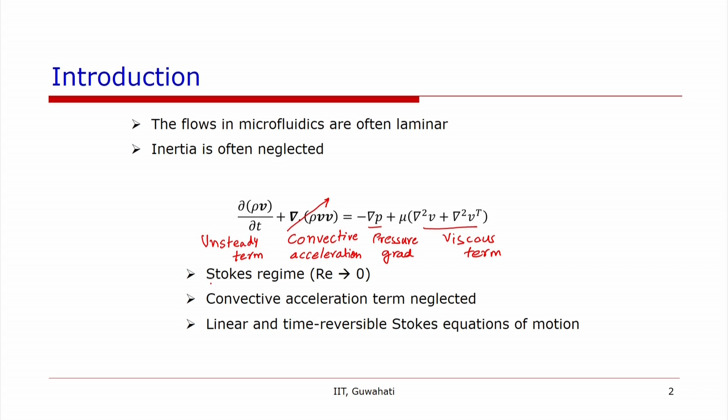When the Reynolds number is low, we often tend to neglect the convective acceleration term, and the unsteady term can be neglected if the flow is steady. This suggests the flow to be in the Stokes regime.

Why do we tend to do this? Because this gives us a linear differential equation which can be solved analytically.

Now, this may not always be the case, because we know that in a channel, flow is often laminar below Reynolds number 2300 or so. But for example, if we have a Reynolds number of 100, then the inertia is not negligible. We cannot neglect the inertial term, but the flow will still be laminar.

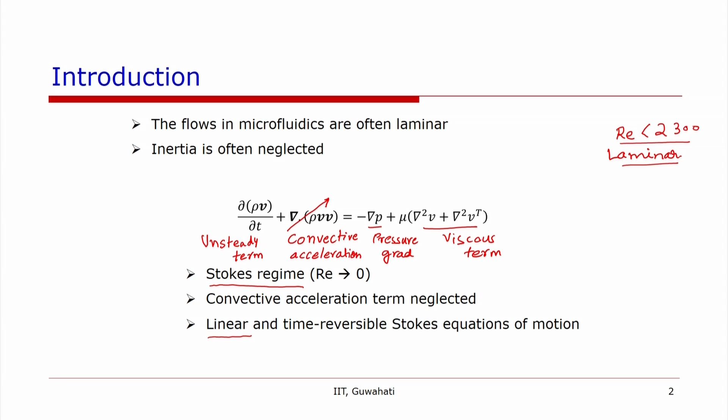So in the Stokes regime, there are some beautiful results that one can see. For example...

In the mirror symmetry time reversal theorem, Bretherton suggested that when moving in a steady unidirectional shear flow, which can be represented where we have a gradient in the velocity, at small Reynolds number under the action of viscous forces alone, inertial forces are neglected and the flow is Stokes flow.

To every orbit of a given finite rigid body, there corresponds one of the body of opposite mirror symmetry. The corresponding orbits are mirror images obtained by reflection in a plane perpendicular to the streamline but traversed in opposite sense. This suggests that if a rigid spherical particle, or a sufficiently symmetric particle which is symmetric about its rotational axis, no lift force will act on it for a simple channel flow.

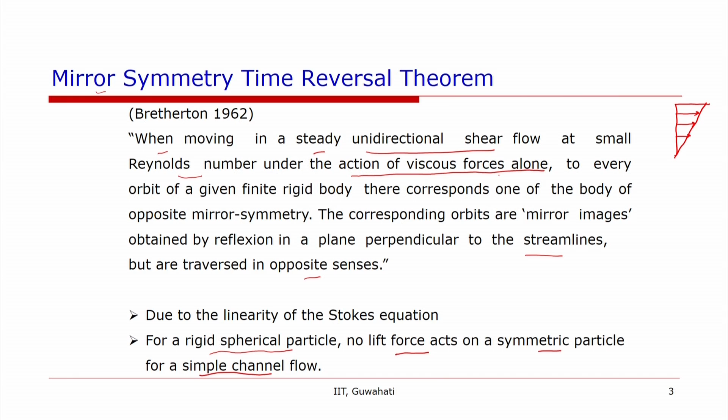So the particles will not experience any lift force, and by lift force here I mean the force on the particle in the transverse direction, the direction normal to the streamlines. So the flow is symmetric in Stokes flow. However...

In microchannels we can also experience non-linear effects due to a number of facts. For example, if the flow is non-Newtonian, it may follow a power law model, or it can be a viscoelastic fluid, and so on. So the non-linear effects can come into the picture when the fluid is...

Non-linear effects can come into the picture when the fluid is non-Newtonian, or when the structure of the channel in which the flow is happening is asymmetric. That can also give rise to non-linear effects in the flow.

And if the shape of the particle, as we have just seen, is symmetric about its rotational axis, then it does not experience any transverse lift. But if the shape of the particle is asymmetric, then we can see non-linear effects. If the particles are deformable, then deformability of the particle may also induce a non-linear effect, such as a lift on the particles.

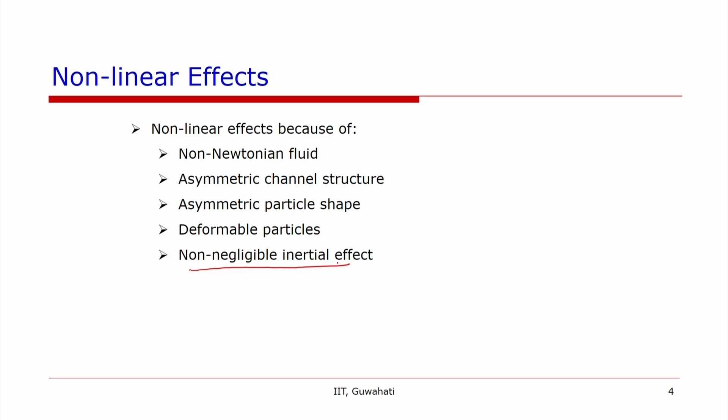And finally, what we are concerned with in this lecture is when the inertial effects are non-negligible. So, inertial effects can be important in microfluidics.

As we said just a few slides back, the flow in the microchannels is still laminar but non-negligible, say at about Reynolds number 100, and this has the properties of laminar flow in the sense that the flow is deterministic in nature. You can still solve the equations without needing heuristic models. You may not always solve them analytically, but you can get a numerical solution without the need for empirical or heuristic models for turbulent flow.

And the fluids and particles can still be controlled and manipulated like we can do in the Stokes regime, plus the additional effects that come into picture, that the flow becomes non-linear and the motion of the fluid is irreversible, unlike in Stokes flow. And these effects can be quite important.

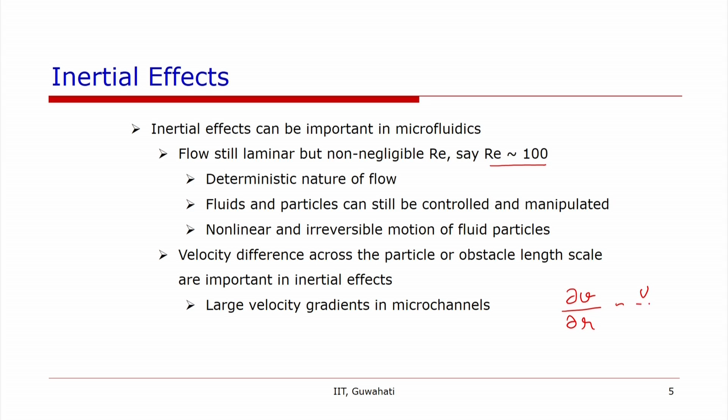Now, these effects are often because there is a velocity difference across the particle or across an obstacle length. So these velocity differences, or velocity gradients, are responsible for the inertial effects. In the microchannel, the velocity gradient, del V over del R, can typically be scaled by U over a typical dimension of the channel. So these gradients become large in microchannels, and the nonlinear forces or effects can become important when compared to those in a conventional channel.

So let us look at some numbers here. If you compare a channel of diameter 100 micron and a large channel of diameter 1 centimeter, and the flow rate in the microchannel is about 150 microliters per minute, then the average velocity U average will be equal to Q divided by pi by 4 d squared, and the maximum velocity will be 2 times U average. From that we calculate the maximum velocity, which comes out to be about 0.38 meters per second.

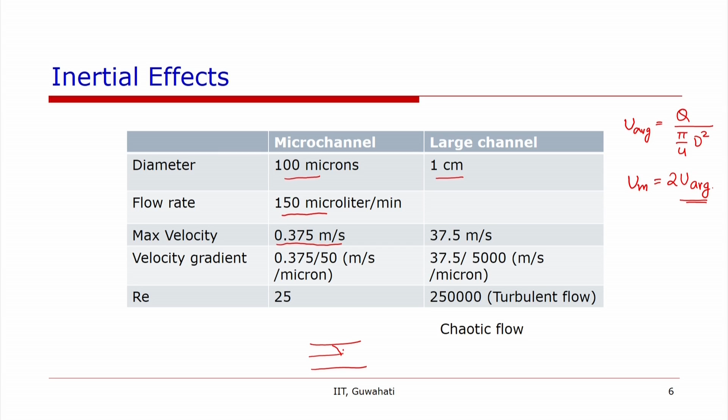The velocity gradient across the channel will be the maximum velocity divided by the radius of the channel, so this velocity gradient is about 0.37 meters per second divided by 50 micron. Now, if we want to achieve the same velocity gradient in a large channel, where the channel size is 1 centimeter, which is about 10 mm or 10,000 microns, the radius will be 5,000 micron. So across a 5,000 micron radius, one will need 37.5 meters per second of velocity to achieve the same velocity gradient.

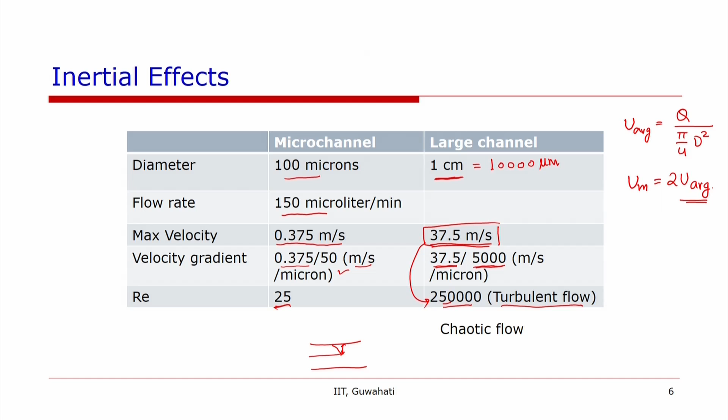Now, if we want that 37.5 meters per second velocity, the Reynolds number in this case becomes 2.5 times 10 to the power 5, or 2.5 lakh, which means the flow is turbulent, whereas for the same velocity gradient the Reynolds number is only 25 in the micron size channel, so the flow is still laminar. We can achieve such flows probably in a large channel, but the flow will be turbulent and highly chaotic, so we will not be able to manipulate or control the flow of the particle in such a case.

That is why this effect becomes quite important in microchannels, and it has been utilized to good effect to develop various microfluidic devices for a number of applications, especially in biological applications, in cell sorting and so forth. So this inertial microfluidics refers to the use of inertia of the fluid in microfluidic systems to manipulate particles, to focus them, concentrate them, bring order to their flow, separate them, transfer and mix particles and fluids. This requires a clever use of particle properties, fluid flow rates, Reynolds number, channel structure or orientation and so on. So inertial focusing is one of the related topics of inertial microfluidics, one of the effects utilized extensively in recent years for microfluidic applications.

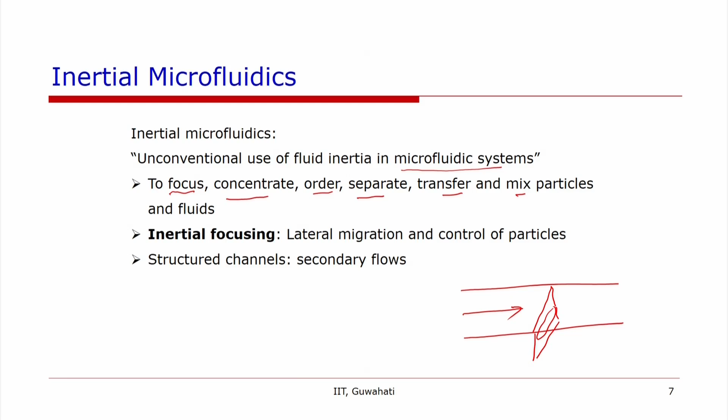The other effect which is combined with inertial focusing is the secondary flow. Secondary flow refers to flow in a direction normal to the main streamline flow. So if in a channel the flow is happening in the streamline direction, then at a cross section normal to this, the flow velocities normal to the streamline are generally termed secondary flows, in addition to the primary flow, which is in the streamline direction.

This secondary flow can often be combined with inertial focusing, and this secondary flow can be achieved by having some changes in the geometry of the channel. For example, in a curved channel one can have secondary flow, or one can have grooves on the channel, or obstacles in the channel, or some pillars used as obstacles. So these structured channels, alone or coupled with inertial focusing, can have different effects in microfluidic applications.

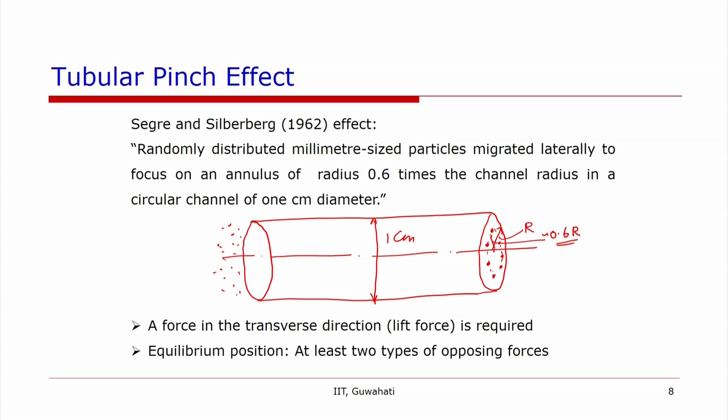Coming to inertial focusing, in 1962 Segre and Silberberg observed an experiment that in a circular channel of 1 centimeter diameter, they introduced some particles randomly at different locations, with no preference for any location. What they observed was that after some distance, the particles focused at a particular position, and this position was about 0.6, or about 0.63, times the channel radius. This effect they termed the tubular pinch effect.

At the time when they observed this, there was no explanation for the phenomena, and after that there was a lot of effort to explain it.

Now, because the particles which are randomly introduced in the channel settle at a particular equilibrium position, there is radial motion of the particles. Of course, this radial motion will be driven by a force on the particles. So there has to be a lateral force, or what we term as lift force, on the particle, which drives the particles in the radial or transverse direction. Now, because there is an equilibrium position, there have to be two opposing forces, because if the force acts away from the center of the channel, the particles should go and stick to the wall, or if the force is directed towards the center, all the particles should be in the middle of the channel.

However, this equilibrium position was observed between the center and the wall of the channel. It must be pointed out that the concentration of the particles was small in the experiments. So there have to be at least two forces acting in opposite directions: one force that acts towards the center and another that acts towards the wall. By the competition, or the equilibrium, of these forces, the equilibrium position will be attained.

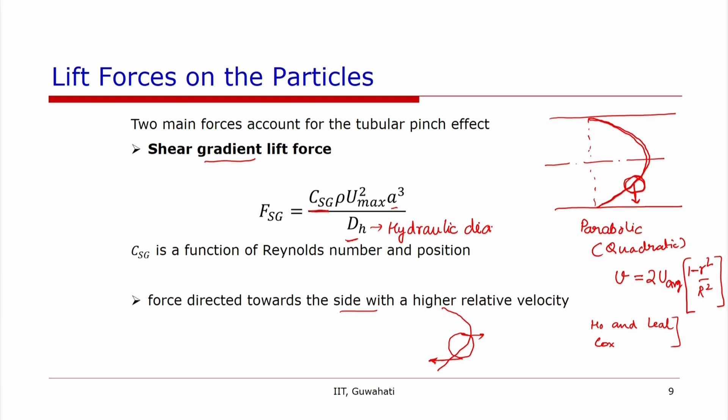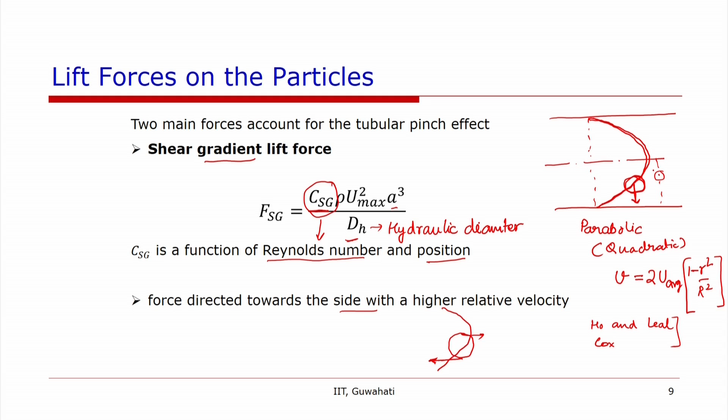The scaling for this force has been given as a lift coefficient, called CSG, or constant for shear gradient, times rho u max squared a cubed over dh, the hydraulic diameter of the channel. This CSG is not necessarily constant; it is a function of the Reynolds number of the channel and the position of the particle, that is, the distance of the particle from the center of the channel.

Another force that is required, acting away from the wall, comes from the wall lubrication force. When a particle moves near the wall, two things happen: one, because of the wall effect, the particle lags behind the fluid, and the streamlines, the bulk of the fluid moves away, and a pressure builds up in the constriction.

In the constriction between particle and wall, when the bulk of the fluid moves away from the wall, the streamlines become dense here, and the pressure is high compared to the other side of the particle.

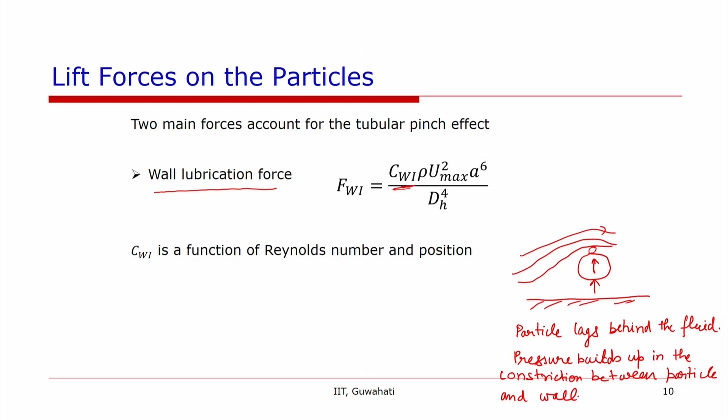Of course, there will be a force directed away from the wall, and this force is scaled as a constant, which is the lift coefficient of wall lubrication, into rho u max squared, into a raised to the power 6, divided by dh raised to the power 4. So while this velocity scaling is the same, the dependence of the two forces on the size of the particle and the size of the channel is different.

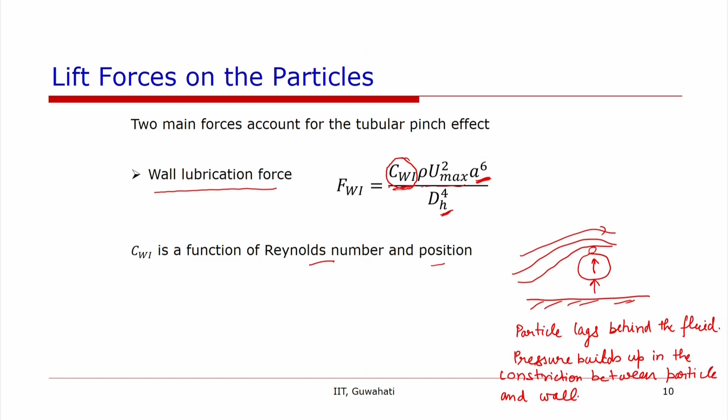The CWI is also a function of the Reynolds number and the position of the particle. So the dependence on velocity is not necessarily what we see in this equation, because Reynolds number also involves velocity. So by these two opposing forces, the equilibrium position of the particles due to inertial focusing was explained, or this tubular pinch effect was explained.

Now one might also think of some more lift forces. For example, a lift force acts on a particle which is rotating in a uniform flow, where there is a relative velocity between the particle and the fluid. If the particle is rotating with a velocity omega, the fluid on the side where it supports the rotation of the particle will have a higher velocity, let us say u plus omega r. On the other side, the velocity will be reduced, u minus omega r, not necessarily the same magnitude, but this creates a velocity difference.

By considering Bernoulli's theorem, we know that at the lower velocity side we will have high pressure, so the force will be directed from that side to the other side. So there is a lift force, and this lift has been defined here. The magnitude of this lift can be given by the formula given by Rubinow and Keller. But the magnitude of this lift force on a rotating particle was significantly low when compared with the shear gradient lift force or the wall lubrication forces on the particle.

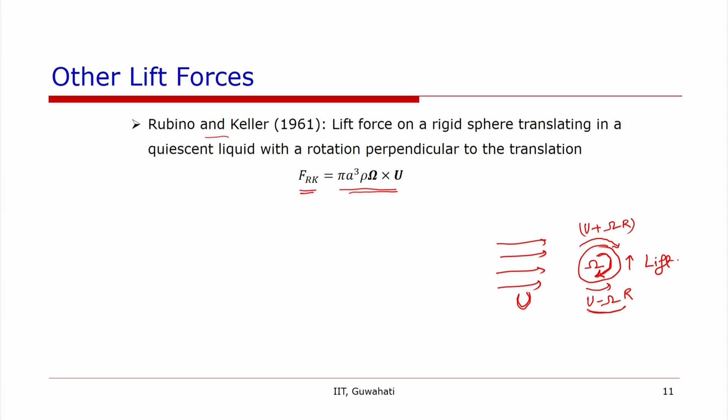Then the other force is very closely related to the shear gradient lift force. In this case, there was not a gradient but a simple Couette flow. For those who do not know, Couette flow is the flow in which the velocity profile is linear, often achieved by flow between two parallel plates in which the upper plate moves with a velocity and the lower plate is fixed.

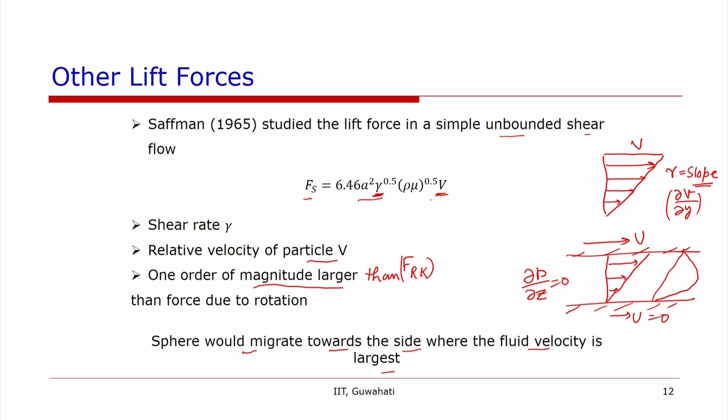So now, having understood the forces or the physical effects behind the tubular pinch effect, if we want to develop a device in which the fluid velocity... we want to calculate the focusing positions, then it is important to know what channel length is required for the focusing of the particles.

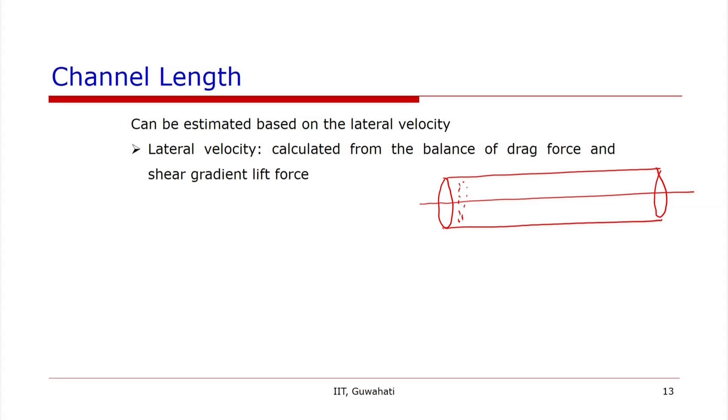So let us say the particles are introduced at this position, and we need the length required in which the particles can focus from random positions to their equilibrium positions. Now, this can be calculated.

L focusing will be equal to Um into time. So the migration is the velocity, the lateral velocity of the particle, and time is the time required for the particle to reach the equilibrium position.

For design purposes we should consider this T maximum. T maximum will be equal to the maximum distance that will be slightly less than r. So if the particle which is near the center wants to reach the equilibrium position, the maximum distance it might need to travel is a fraction of r.

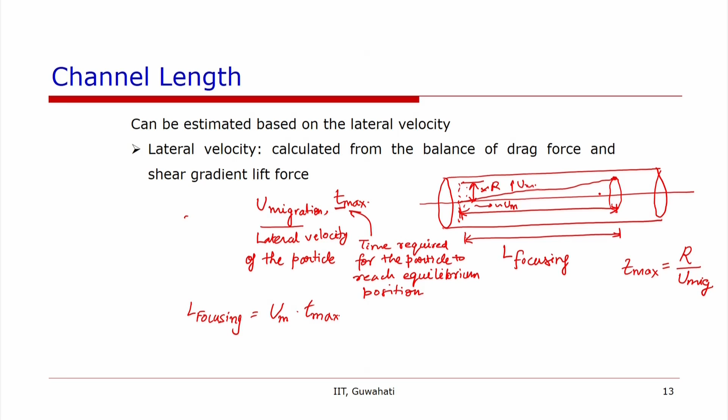So the time to reach this position to cover both distances will be equal, but the velocities will be different. The velocity in the axial direction we scale as um, and velocity in the radial direction is u migration. Now to calculate u migration, we can consider the balance between shear gradient lift force

and drag force. So shear gradient lift force is CSG rho um square a cube by dh, that is rho u max square a cube over the hydraulic diameter. That will be equal to the drag force on the particle, which acts in the radial direction because of the motion in the radial direction.

So the drag force we consider is 3 pi mu U mig a, and because the velocity magnitude will be small, we can expect the flow to be Stokes flow, so we can use the Stokes drag here. We use the balance of forces to calculate the migration velocity, and from that we can substitute it into T max and get the focusing length.

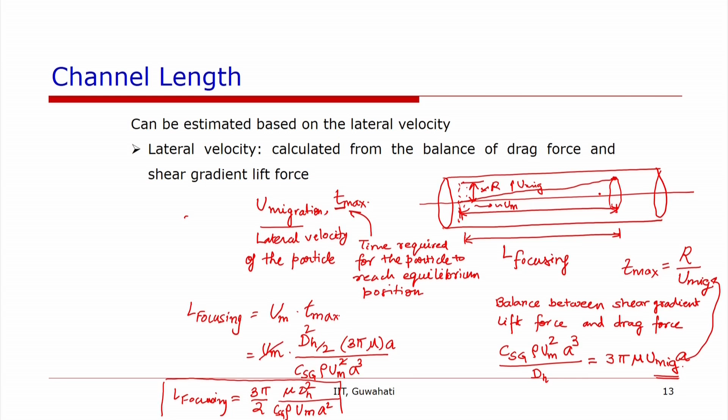Now looking at the effect of the cross section of the channel - in microfluidics it is often convenient to have channels which are rectangular or square in shape. So what we have seen till now is that there are focusing positions, and because the geometry of a cylindrical or circular channel is symmetric about the axis, the particles focus on an annular location. But in a rectangular channel it is not so obvious.

A number of experiments have been done, especially by Di Carlo and others, and it has been observed that there are 4 focusing positions in a square channel, at a distance of about 0.6 dh by 2 from the center of the channel.

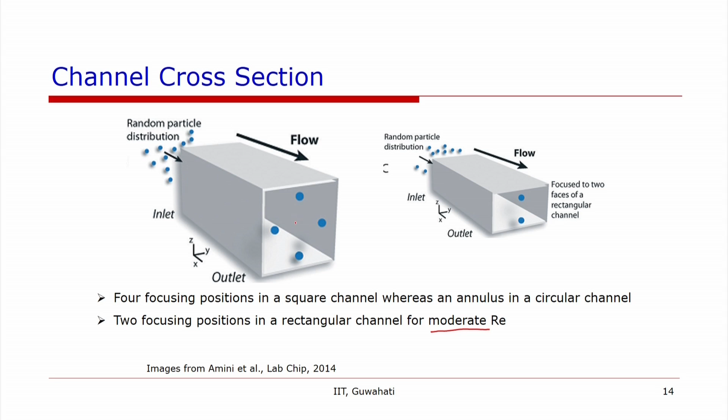Now if the channel aspect ratio is increased, that means the channel becomes rectangular, then at moderate Reynolds number it has been observed that the focusing positions change from 4 to 2. This is explained by Di Carlo and others by the magnitude of the forces that act on the particles.

So in a square channel, what is shown here is the force field in a quarter of a channel. The particle experiences similar forces from both sides of the wall because the velocity gradients are the same. So the particle focusing position is somewhere here, and another focusing position somewhere here. However, in a rectangular channel, the velocity gradient in this direction differs, as this is a part of a rectangular channel.

And that is what is shown here. The velocity, this distance and this distance are different, so the velocity gradient in this direction, because the distance is small, the gradient is large, whereas this gradient is small. So the force on the particles is larger here than in this direction. So this position becomes unstable and the particles focus on these two locations.

This has been utilized in a number of applications to change the equilibrium position of the particles, to reduce the equilibrium positions of the particles to only 2 positions, so that the particles can be separated easily.

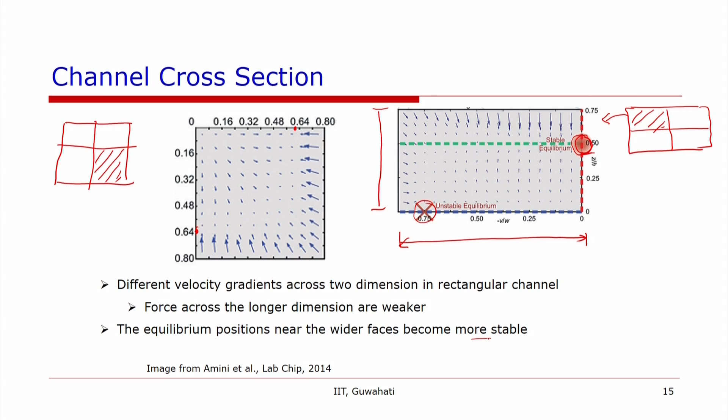However, Reynolds number can also affect the equilibrium positions, though only slightly. With increasing Reynolds number, it has been observed that the shear gradient lift force is a stronger function of Reynolds number than the wall lubrication force. So the shear gradient lift force becomes larger than the wall lubrication force, and the equilibrium position shifts towards the wall.

In rectangular channels, this might sometimes also lead to the focusing position increasing, so the number of focusing positions can become 4 again.

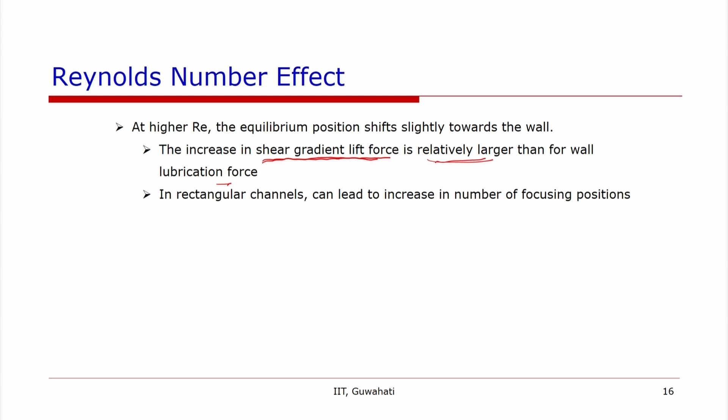Now what we have been discussing till now is the motion of rigid spherical particles, or the focusing of rigid spherical particles. What if the particles are deformable?

The deformable particle can be classified into 3 different categories. One is elastic solid particle, where the particle's outer wall behaves elastically and the inside of the particle also behaves as an elastic solid. The other category is droplets, where you have a fluid, so the behavior at the interface is governed by interfacial phenomena or surface tension. That elastic effect comes from surface tension, with fluid inside the particle.

Because of the shearing motion at the interface, the fluid inside will also have a motion, and that will reduce the drag on the droplet. So the deformable droplet is another category, along with deformable capsules. In capsules, the capsule might be filled with a fluid, but the outer wall is a solid elastic wall, so it acts as a solid wall, while the filling inside the particle is fluid.

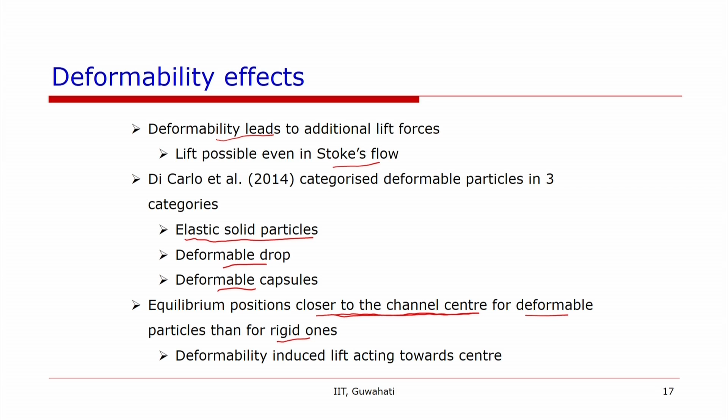By comparison of the equilibrium positions for deformable and rigid particles, it has been observed that the equilibrium position shifts towards the center of the channel for deformable particles compared with rigid particles. So that means the deformability-induced lift acts towards the center of the channel.

Utilizing this fact, Tanaka et al. developed a microfluidic device to separate cancer cells, which are deformable, from rigid beads. They did experiments with other cells also, but what we are discussing here is that the cancer cells, which are deformable, had their motion compared with rigid particles, and they found that the focusing length required for rigid particles was more.

As we have just seen, the focusing length L will be inversely proportional to the migration velocity U. So the focusing length is inversely proportional to migration velocity: the higher the migration velocity, the lower the focusing length required, or the lower the time required for the particle to reach its equilibrium position.

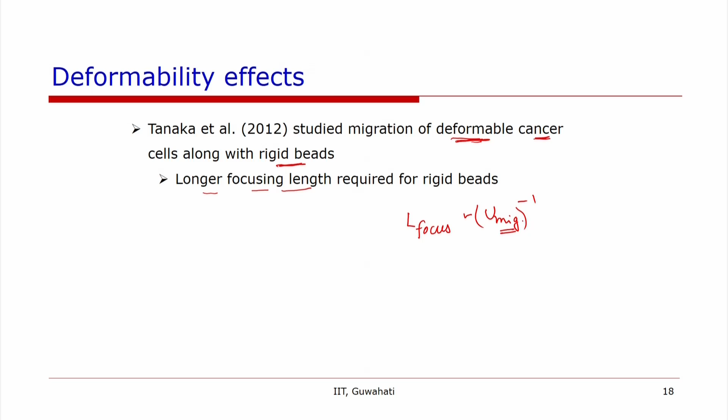This migration velocity comes from the shear gradient lift force, so the higher the shear gradient lift force, the higher the migration velocity and the smaller the focusing length.

Now we look at some applications of inertial microfluidic effects. The first application is in sheathless flow cytometry. Flow cytometry refers to the focusing of cells for cell sorting or cell counting in a number of biological applications, and this is done by hydrodynamic focusing in a standard cytometer, where the processing rate or throughput is about 10,000 cells per second.

It has been shown by Hur et al. that the processing rate can be increased up to 1 million cells per second by using inertial microfluidics.

There are two factors that account for the higher processing rate. One is the higher flow velocity, and the other is that parallelization is possible in the inertial microfluidic channel.

In inertial microfluidics applications, they had about 256 channels in parallel, and the particles achieved the equilibrium position with no extra force fields or devices required. This method is passive focusing, where the channel structure and flow velocity are utilized to focus the particles, and then counting of the particles can be done.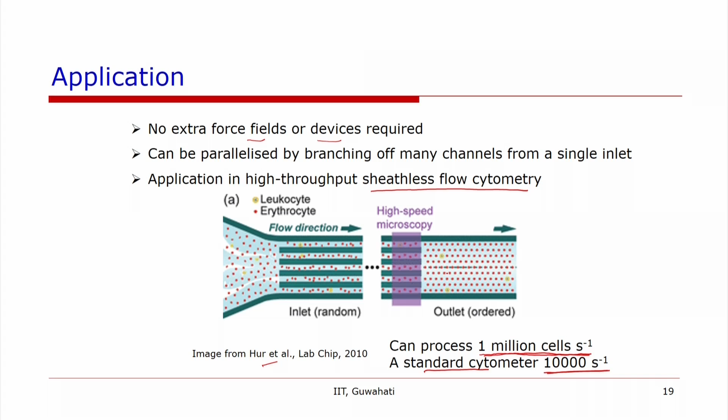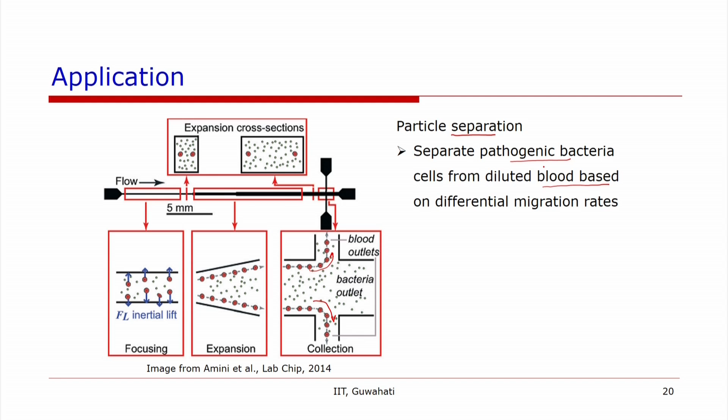Another application is separation of particles, where blood cells were separated from bacteria. The size of blood cells is larger than bacteria, and due to inertial force, the blood cells, being significantly larger, focused to equilibrium positions. Using a channel expansion, the focusing position was shifted towards the side walls, and these particles were separated and collected from the pathogen bacteria in the fluid.

The third application is fluid exchange around cells and particles. Here particles are present in one fluid and are exchanged or migrated toward another fluid. A rectangular channel was used with two focusing positions, and by using different flow rates of the fluids, the focusing positions were manipulated so they fall in the second fluid.

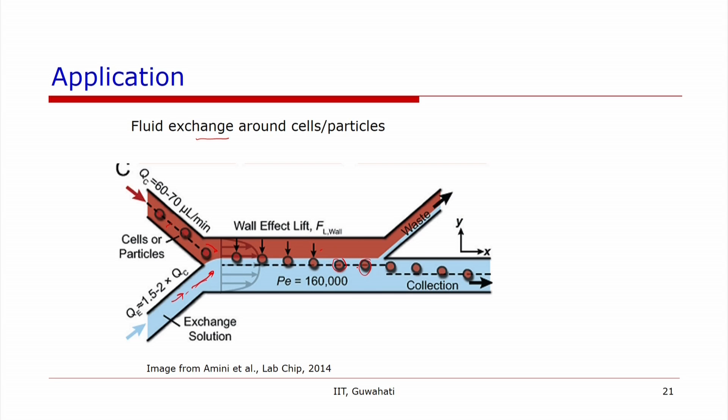So when particles arrive from the two separate channels into this channel, they migrate to a position where the focusing position is in the second fluid. The particle migrates from the first fluid to the second fluid, and these particles are separated.

Until now we have looked at the flow of particles in a straight channel without any structure or modification in the channel geometry, except the cross section, which we've looked at as circular, rectangular, or square shaped. Some people have also worked with trapezoidal channels and got interesting results there.

In structured channels, by changing the channel path or creating some structures in the channel, secondary flows can be generated. We have listed three different structured channels here: the channel shape, which can be curved - we'll look into that a bit later.

The other structured channel involves grooves or herringbones on the channel walls, created on one wall of the channel. This causes a secondary flow in this plane - shown here in the XYZ, this being an XZ plane - so there is motion in the secondary direction, or secondary flow in this case, and this causes good mixing.

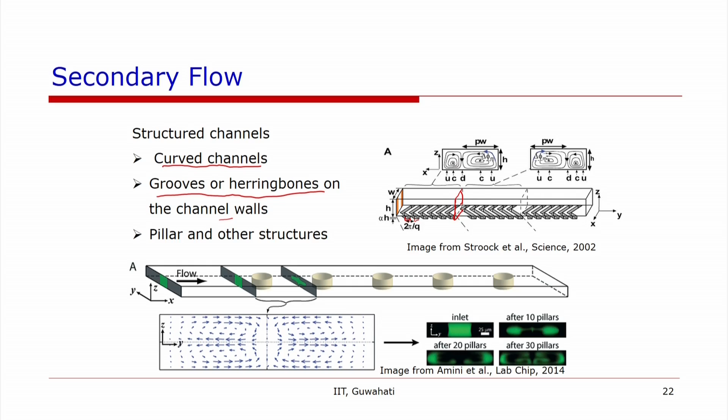The other structured channel involves creating pillars in the channel. If one creates a simple geometry in which pillars are kept at different locations at regular intervals in the space, one sees secondary flow in the particle, and combined with inertial focusing, one can again have different equilibrium positions, changing the number of equilibrium positions to develop applications.

Now coming to curved channels - there is an interesting phenomenon here. When the flow happens, say, into the page in this direction, the inner wall, which is the convex wall, and the outer wall, which is the concave wall, experience a centrifugal force on the fluid, and that force will shift the velocity profile towards the outer wall. So the main velocity profile in the main direction will be shifted.

In the straight channel, the velocity profile is supposed to be parabolic, whereas this maxima will shift towards the concave wall, and this will cause velocity gradients to be sharp here, and that will set up a pressure gradient in the transverse direction.

As a result, the fluid will move from the center of the channel towards the wall, and then again come back. So recirculations will set up in the secondary direction, or the transverse direction.

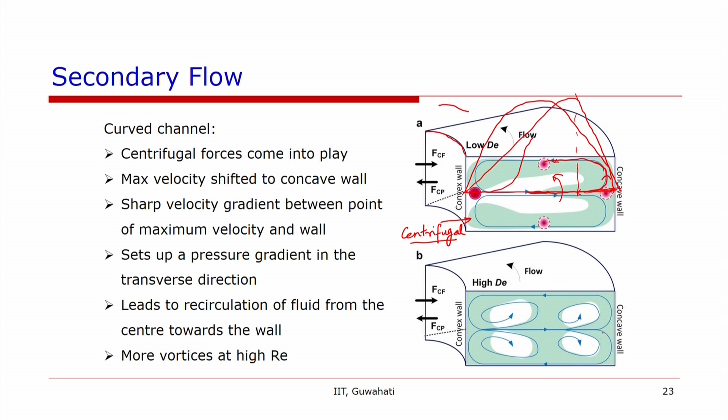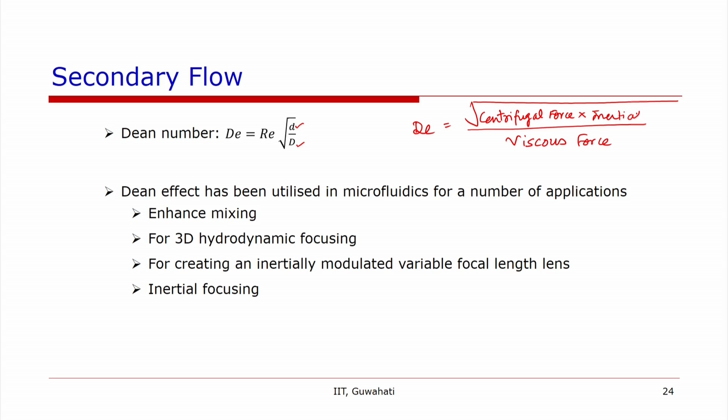This effect is characterized by the Dean number, which is Reynolds number into small d by capital D. This Dean number is the ratio of viscous forces, and centrifugal force and inertial force. Small d is the channel diameter, and capital D is 2 into the radius of curvature of the curved channel.

This effect has been utilized in a number of applications in microfluidics. For example, since the flow is laminar in microchannels, if one has single phase flow and would like to enhance heat transfer or mass transfer, then utilizing this effect, one can have intense mixing of the fluid.

So this has been used as a means of mixing in channels, and it has been observed that the heat transfer coefficient or mass transfer coefficient can increase 2 to 3 fold compared with single phase fully developed flow in a channel.

It has also been used for hydrodynamic focusing or creating an inertially modulated variable focal length lens, or for inertial focusing, which we are going to discuss.

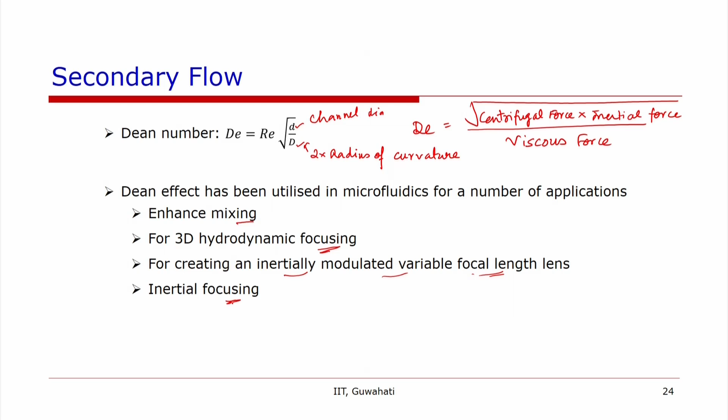In inertial focusing, this lateral motion of the particle occurs because particles are moving in the lateral direction due to inertial lift, and the secondary flow further enhances this lateral motion of the particle. This helps the particle reach the equilibrium position faster.

That results in the distance required for focusing becoming smaller. One can also play around with the number of focusing positions. It has been shown that the focusing length remains unaffected at low Reynolds number or Dean number, but at higher Dean or Reynolds number, the focusing length can become significantly shorter.

Equilibrium positions can be modified, because when the particle is moving, it will experience more drag, and this additional drag on the particle is because of the secondary flow, so the particle equilibrium position is going to change.

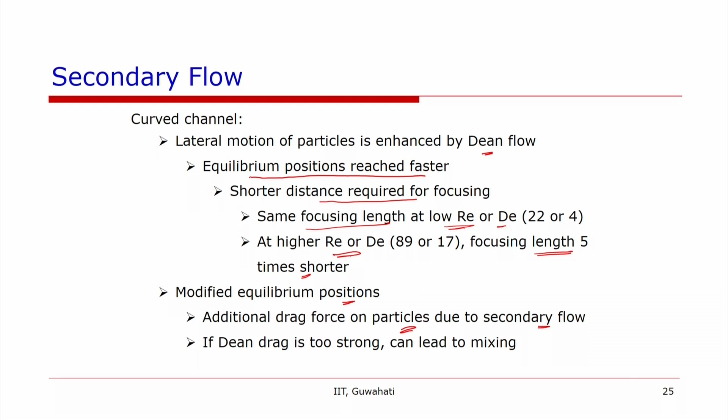However, if the drag caused by this secondary flow, or the Dean flow, is more, this can lead to mixing. So there are two different kinds of curved channels that have been used.

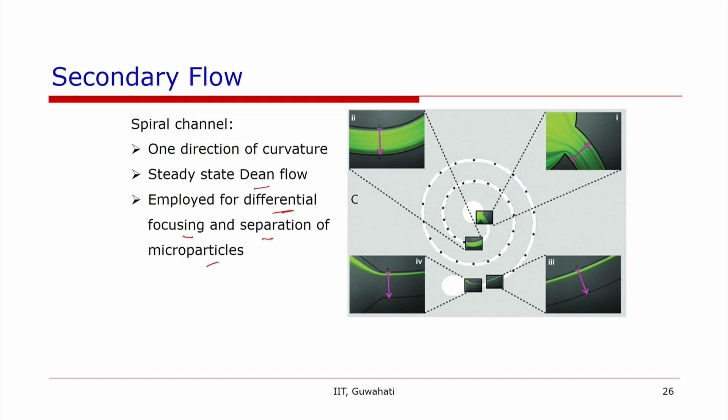The other one is the curved channel with alternating curvature, but notice that this curvature is not symmetric - it is not the same here and in this segment. So one might need to make sure that these opposing channel segments are not symmetric, so that the curvature effects are not nullified by the two alternating symmetric portions.

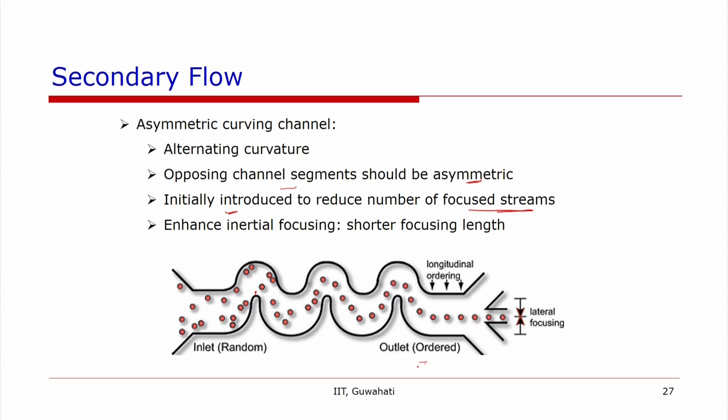In this, it has been shown that the focusing length can be reduced and the number of focused streams can also be reduced in the channel. So this has also been used for applications of cell separation or cell focusing.

In summary, we need to take into account the inertial effects in microfluidics, and these inertial or nonlinear effects have led to a number of interesting applications, particularly in inertial focusing. In this lecture we first looked at the tubular pinch effect, which suggests that in a channel at higher Reynolds number in laminar flow, particles achieve an equilibrium position.

This equilibrium position is a function of channel Reynolds number, channel cross section, and the structure of the channel. These have led to a number of applications where microfluidic devices can be developed by playing around with the channel structure, the particle shape, the particle deformability, and so on and so forth.